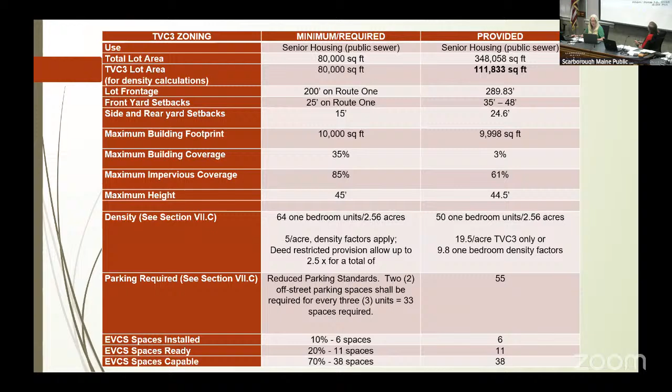And other than that, the parking is really the same. The reduction in parking would only require 33 spaces. They are proposing 55, so they do have 1 space per unit. They are meeting all of the bulk standards, and they are under the density allowances. They are also meeting our EVCS spaces installation. The height, they're right there at 45 feet. The maximum impervious coverage, they are lower than the allowed 85%, and they are much lower for the maximum building coverage. And with that, I will turn it over to the applicant and let them answer any questions. Sure.

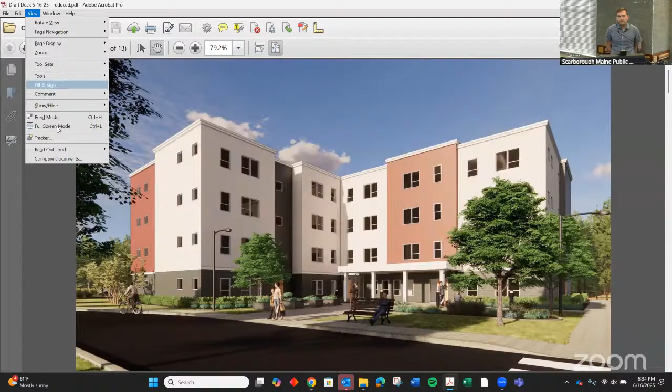Sam, I will promote you. Oh, thank you. All right. Thank you everyone for coming. My name is Ben Money. I'm a development officer for South Portland Housing Authority and the 501c3 South Portland Housing Development Corporation. So today we're going to be talking about the revised development, Marshview Terrace. A few things about our organization for any members of the public that weren't here for previous presentations.

The South Portland Housing Development Corporation is a 501c3 nonprofit that is able to work in and around South Portland and truly the whole country. Our goal is to provide safe, honest, respectable, clean housing in our community and neighboring areas. Through that, we have developed and currently own 795 units of housing. We're developing another 100 in the area. One of ours is Jocelyn Place, a 60-unit building near the Hannaford. That building's been online for just over a year, and it has provided us with a ton of excellent data that has been poured into this project as well.

Some of the items I just want to highlight is that we've been able to use our connections with the city and neighbors to really take in a lot of community feedback through this process. We've been very process driven based off of what's set forth by the town, which is also why there's been so many opportunities for public comment: the town council and our zoning application, as well as previous comments and meetings that we've had with this planning board. We like to think that this has been a culmination of a year and a half of collaboration with the community, and that's what's brought us to this point now.

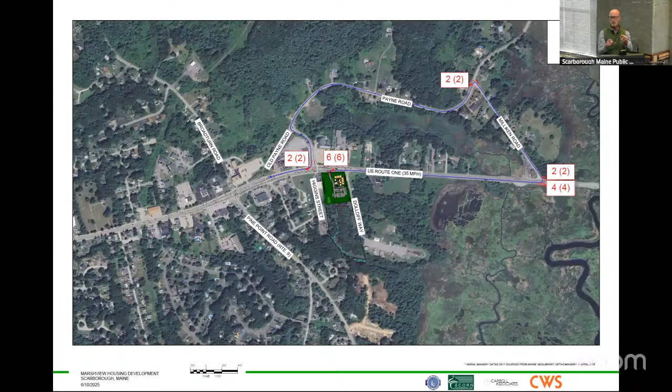And the other thing to keep in mind is, again, we don't have data for what that site used to generate for traffic. It was a flea market, and I don't even know historically what was there. It's likely when that was operational, it was generating more traffic than this. And so from the standpoint of comparing what's going to be generated by this site versus what's happened historically, this is a much less intense trip generating use. Next slide.

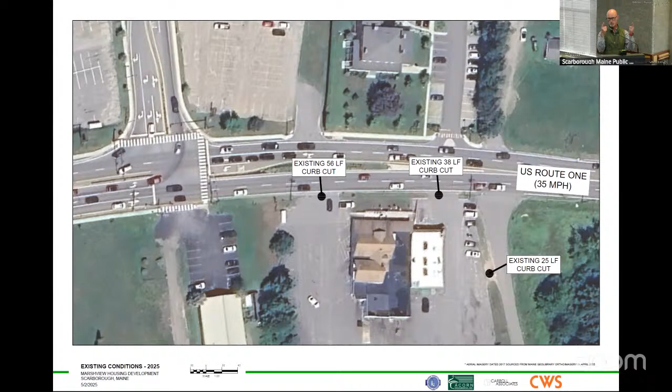So again, going back quickly to this slide, this is the slide I went through. This is existing conditions, 2 big curb cuts on Route 1, another curb cut on Dolloff Way, and then next slide. So this is the plan. So the plan basically is a single driveway, a relatively narrow driveway.

And so again, working with staff, it was desirable to really avoid any sort of left turn out or left turn in movement in terms of conflict points. This really minimizes conflicts. In terms of access management, this is the safest type of configuration you can have in terms of avoiding some of those complicated left in, left out movements. So we have a single driveway where there used to be 3, and it's also narrow. So that's sort of part 1.

Part 2, there are a few sort of minor things, signage to just reinforce the turn restrictions, extending that raised island. Again, it's raised directly in front of that driveway. Then it becomes sort of this flush concrete. The plan is to extend that island so that ultimately it really minimizes that illegal U-turn potential that could happen. But again, that's something that exists, I think, quite a bit along Route 1 in the area.

The other part of this, and that's why I talked about, it's more than just about the vehicle. The project's installing a sidewalk along their frontage. It's going to connect to the sidewalk system at Payne Road where there's a signal. So the intent is, listen, if people want to take advantage of some of the other land uses in the Dunstan Corner area and leave their car in the parking lot, this provides good connectivity to the existing sidewalk system. Hopefully it'll even reduce traffic volumes even more by providing those conditions.

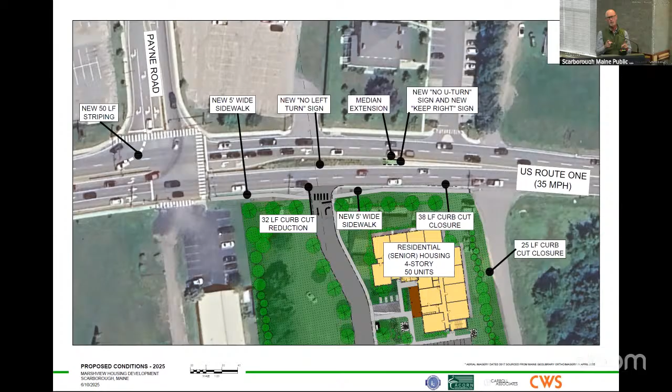And I think that's it. Is that it, Sam? Oh, great. That's right. I forgot about that.

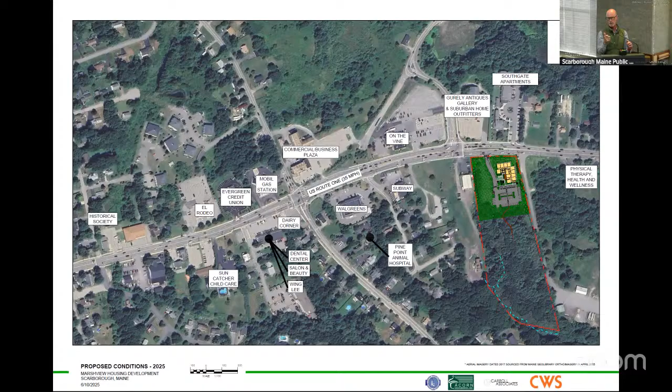And then I think the next slide presents the mixed use condition in this area where we think there are opportunities for people to basically walk between the site, as a residential use, to some of the commercial businesses that are there. That's the whole purpose of locating these types of developments in a mixed use area, to encourage foot traffic or other non-vehicle type movements. There is bus service here. That sidewalk system will provide connectivity to bus stops. So again, there are other opportunities to leave your car in the parking lot.

So I'll just leave you with my general summary on things. From a driveway perspective, and this links with the ordinance, the ordinance really speaks to minimizing conflict points as part of driveways, and this does that. The right in, right out minimizes conflict points. So I think it checks that box. The second one is access management, minimizing the number of curb cuts, thinking about how to manage curb cuts. This project reduces the number of curb cuts and ultimately has one narrow curb cut, so it checks the box on that.

And then another key ordinance element is thinking about all transportation, including walkability. And again, this project proposes a sidewalk system that connects to a pretty robust sidewalk system in the Dunstan Corner area. And so this project helps to do that too. So anyway, thank you very much.

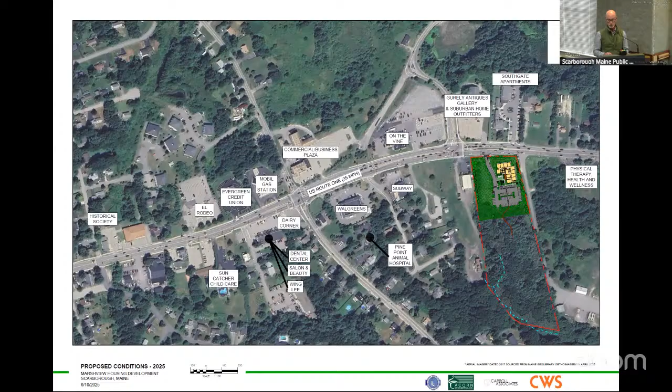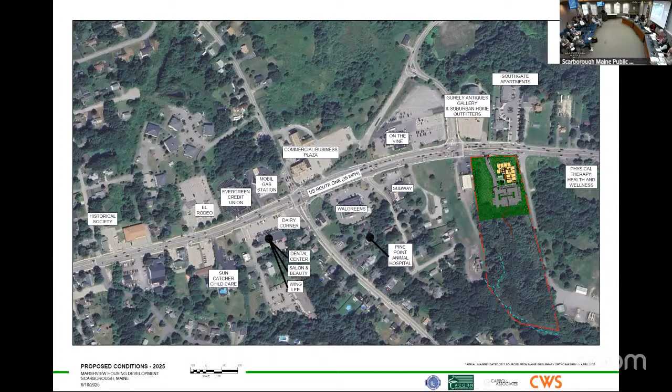Great. Thank you, Tom. Members of the board, my name is Sam LaBelle with Acorn Engineering. I'm just going to run you through the site design and the revised proposal. We are, of course, pleased to be back in front of you tonight with a significantly reduced and lower scale project. After hearing feedback from the board, the public, and council, we went back to the drawing board and took a hard look at how this project could eliminate wetland impacts as well as reduce traffic impact. And what Ben and Tom have already introduced, I think, speaks well to that. We are entirely by right at this point. We are not asking for any variances from the zoning ordinance, nor are we asking for any waivers from the planning board.

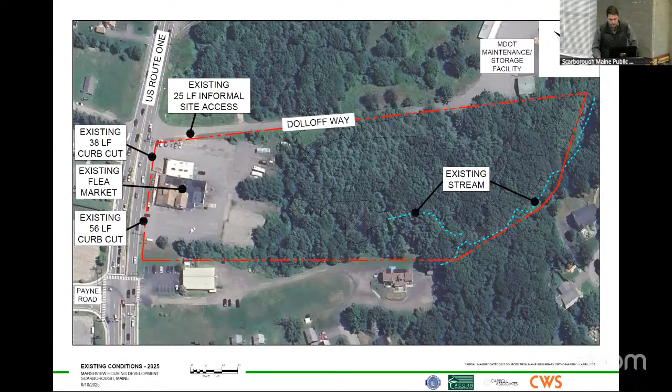So just quickly, again, looking at the existing conditions, you've got the flea market with 3 curb cuts, 2 off of Route 1, really unorganized and informal access into the site. The existing stream and wetlands are within the forested area there to the plan right, which feeds into the Scarborough Marsh system. And then flipping to the proposed site plan, you can see here we are now working entirely within the existing development footprint. In fact, we are actually reducing both the impervious area and the development footprint. As I mentioned, the wetland impact has been reduced to 0. We are respecting at least a 25-foot setback and much greater in most instances.

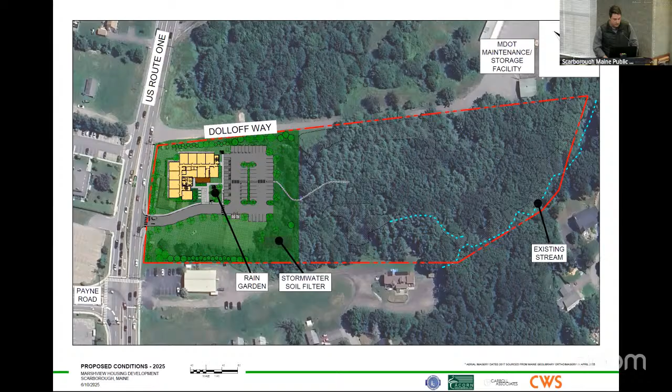Zooming in one more frame into the proposed site layout, we have moved the building back from the proposed 28-foot setback. We're now at 35 feet here at the pinch point. That then increases to 48 feet here towards the middle of the site. Of course, the right in, right out is consistent with any other major site plan that goes through the planning board process. It is a restricted movement by design. Traffic would flow in. We have a pretty conventional parking lot layout with 55 parking spaces, so a ratio of 1.1 parking spaces per unit, which is a fairly standard ratio.

The electric vehicle charging stations we have implemented here at the middle of the site. We fully meet the ordinance in that respect. We've also marked the EV capable parking spaces, as well as providing conduit and pull wire to all parking spaces for potential build out of the EV charging system.

We've incorporated a landscaping buffer around the perimeter of the project, really trying to reestablish vegetation where historically there hasn't been any. I'll show on the next slide a pretty drastic improvement when it comes to impervious area.

One key component of the design that hasn't changed is trying to create this courtyard in the interior portion of the building, or the inside of the L there. This area faces south. It's where the main entrance is. We have provided a rain garden, benches, seats, and other areas for that community aspect and placemaking, which has been really successful at Little Dolphin, which has been operational now for about 2 years.

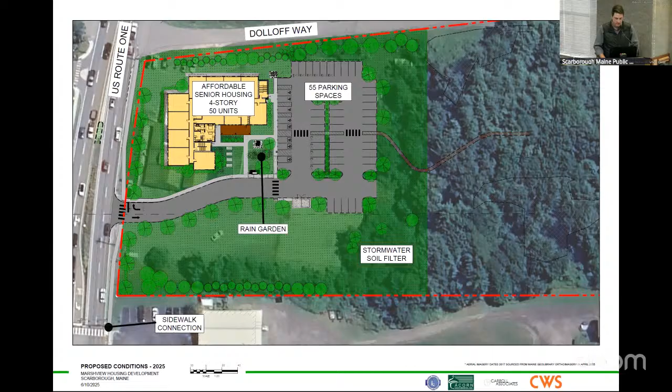And then just putting the project parameters in a table here to compare it to the previous application on the left, which was before the board and council earlier this spring, as well as the existing site on the far right-hand column. So going down, you've got impervious area, which we are proposing at 0.89 acres. As you can see, that's about half of what exists out on site today at 1.79. And it's also a drastic reduction from the previous application.

Similarly, developed area, we are proposing 1.62 acres of developed area. That includes roof, pavement, and lawn areas. That is also a reduction from the existing site and a drastic reduction from the previous application.

Looking at the front setback, the existing site out there today, not including the large deck that is in between Route 1 and the building, but actually taking it to the 2-story structure, is at a 20-foot setback right now. The average front setback for our proposal, we would be more than doubling that. Again, another increase from the previous application. Looking at wetland impacts, the previous application was close to 13,000 square feet. We have eliminated all wetland impacts.

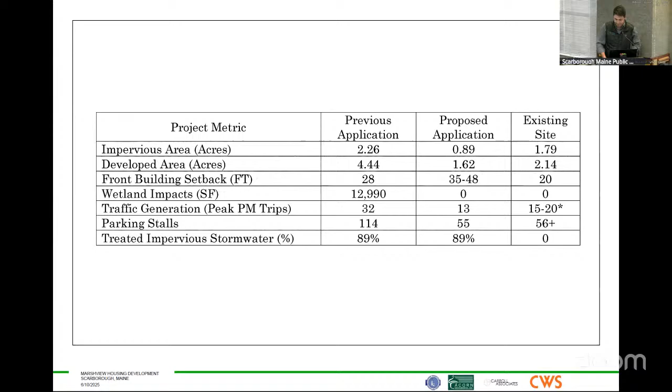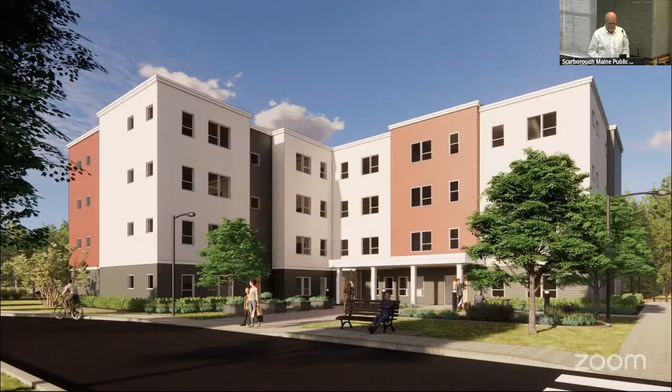Thank you, Sam. I'm Ben Walter with CWS Architects from Portland, Maine, where our office is right across the street. We have been working on modifying this proposal along with the site. Most of the changes have been based on the site, but we've put a lot of focus on the pedestrian character of the building too, the south-facing courtyard, in terms of having outdoor space. You know, this is the home for 50 senior people. We've worked on a lot of senior housing projects, and one thing that's really important is that they do create a community of their own on these sites.

And so we really try to design and reinforce around that. What you're looking at here is what you're seeing on the exterior, the outdoor spaces. The south-faced courtyard is going to be a very viable space, protected from the street noise, et cetera. So that's what we've done. But right inside, beyond those, the entry is all the community spaces that go along with the building.

And aside from that, the building is really 50 apartment units. So it's the ideal size community for a senior housing project, because a certain amount of critical mass makes for a community within the space itself, within the building itself, that's viable. With that said, they're certainly going to have the ability to walk to other amenities nearby, drive to other amenities, et cetera. We've seen this kind of model work very successfully in the past, and that's pretty much all I have to say. So, thank you.

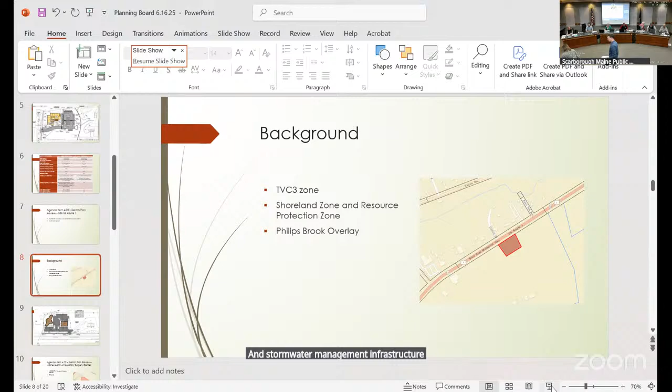All right, the next item for consideration is 4.02. Gorrill Palmer, on behalf of XL Golf, is requesting sketch plan review for a proposed mixed-use commercial development to include a 5,000 square foot hair salon building and a 3,500 square foot office retail building, each with associated parking, utilities, and stormwater management infrastructure at 556 US Route 1, Assessors Map U35, Lot 2A. I believe, Helen, you're going to introduce this one?

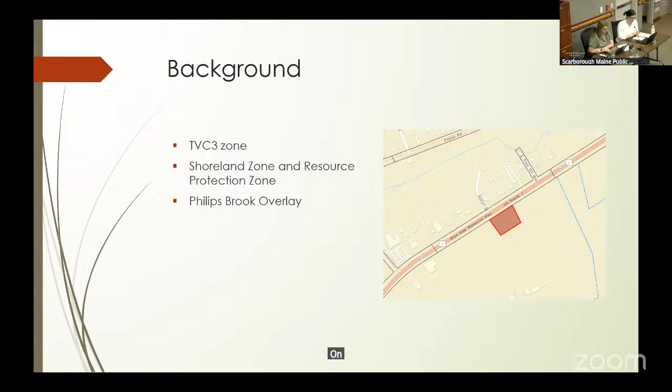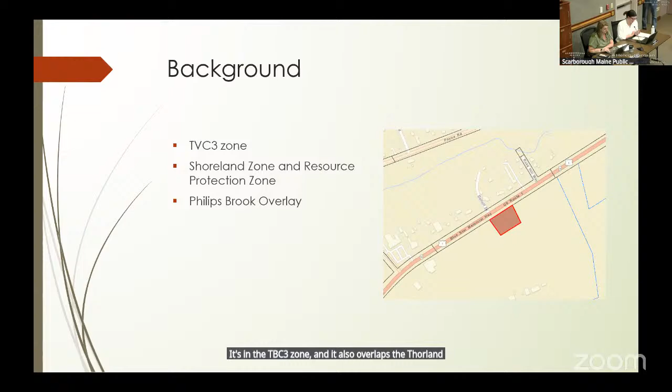Thank you, Mr. Chair. As you said, this is a sketch plan proposal for a 5,000 square foot hair salon and a 3,500 square foot business office on about a 1.25 acre parcel at 556 US Route 1. It's in the TVC 3 zone, and it also overlaps the shoreland zone, the resource protection zone, and the Phillips Brook overlay. And I believe the applicant is available for questions. Thank you. And for the applicant?

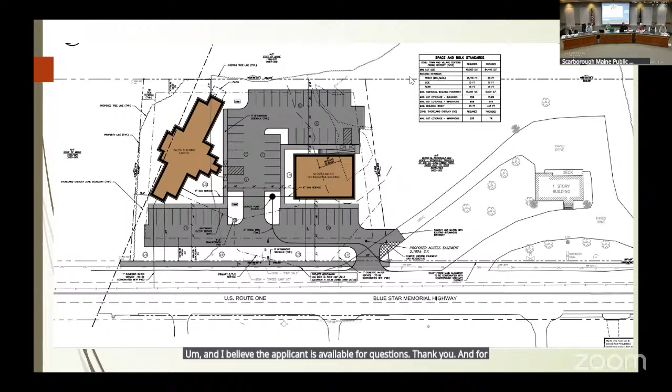Hi, good evening. My name is Caleb Rass. I'm from Gorrill Palmer. I'm a civil engineer representing XL Golf. Here with me this evening is Wendy Holden from Onyx Creative, the project architect for the project. And oh, there I go. Looking to just join in as a panelist here. One moment.

Very good. So as Helen had mentioned, what we're here to discuss this evening with you all is a commercial development located at 556 US Route 1, actually about 800 feet further north on Route 1 from the last project that we just discussed. This is a sketch plan review, and the primary use being a 5,000 square foot salon.

So project overview, we're at map U35 lot 2A. This parcel was part of a larger parcel that was recently split from the adjacent parcel, which has the U-shaped driveway now. And so we're predominantly in the lawn area just north of that. If you've driven by there, there's a little bit of a slope down towards the marsh in the southeast.

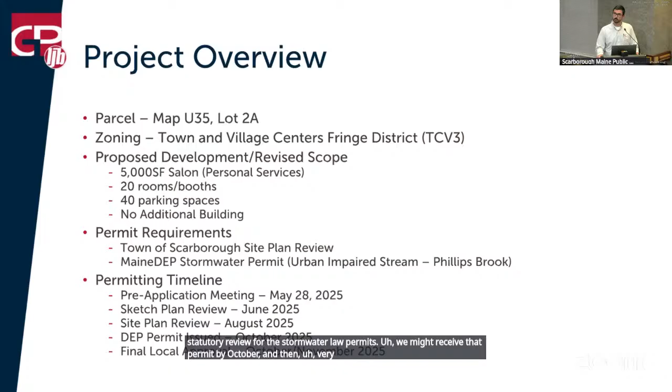So just a couple slides coming up next here, just to orient on the site to where we are. Shown on this view here, we have the Payne Road intersection with Route 1, just a little bit north, as I mentioned, about 800 feet north of the previous project there. Our box is shown in white here on Route 1. We are on the south or the southeast side of Route 1.

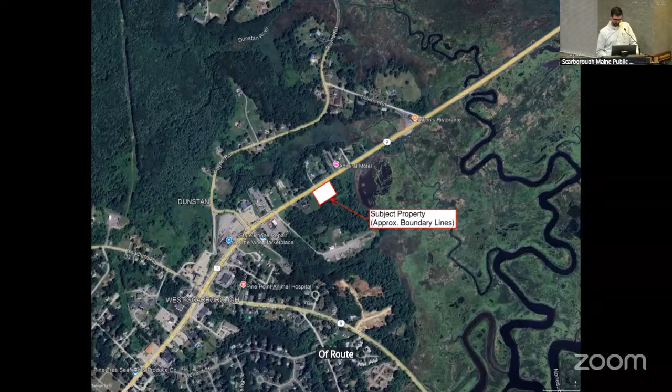Here's another aerial image showing the lot characteristics now as well. So predominantly lawn area now that this property has been developed and then maintained as lawn. There is a portion of wooded area which it looks like has been cleared from time to time, but there are some taller pine trees that remain on the parcel. And then as you move a little bit off site it becomes a bit more scrub. There are some invasives that we've seen in there as well. But overall, our project site will remain in the existing lawn area predominantly.

This is a view now, actually flipped here. So south would be the top of the page, and north the bottom of the page, and Route 1 shown going left to right across the bottom of this plan. So what you can see on this plan is the topography. There is actually a little bit of grade that does pick up across this site, generally from the northwest in the bottom right corner to the southeast in the top left corner.

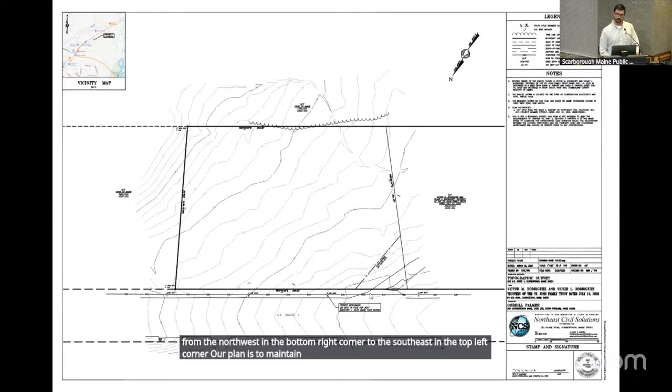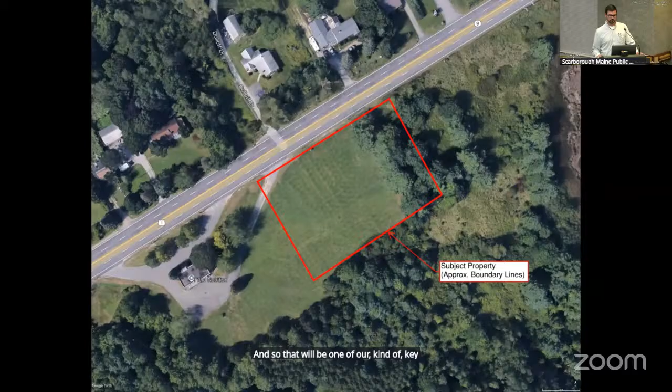Our plan is to maintain this existing curb cut that remains on this parcel now and was seen in the previous aerial image. When this lot was split from the larger parcel, there is an access easement that provides access to the adjacent business that does remain. And so that will be one of our key coordination items going forward, maintaining that access for those folks, and also creating a safe condition for both of us on this curb cut onto Route 1.

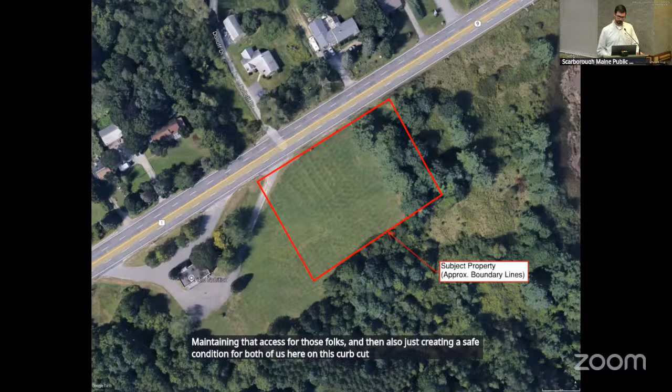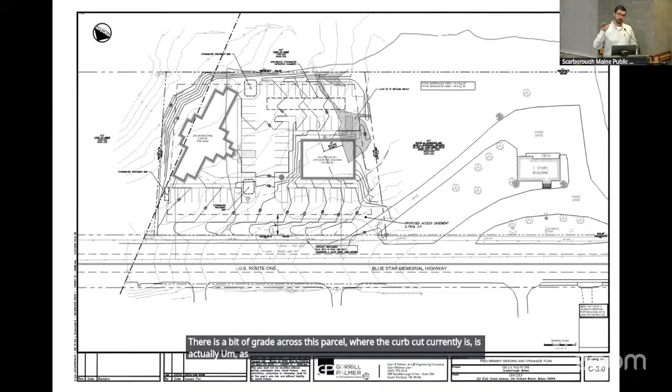For grading across the parcel, one of the key things that will remain will be more or less what we're trying to do with the grading scheme on this parcel. There is a bit of grade across this parcel. Where the curb cut currently is, is actually as the hill starts to more or less crest. So the access conditions onto Route 1 are most ideal at this location.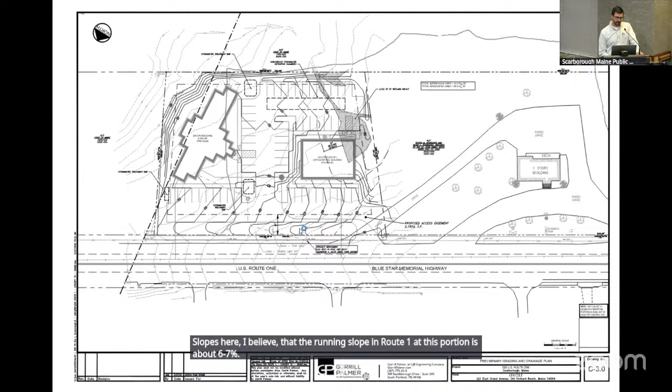You will have some degree of slopes here. I believe that the running slope in Route 1 at this portion is about 6 to 7% maintained. So you'll see similar grades coming down into the site here, if not a little bit steeper, so that we can make up grade to flatten out so that we can provide areas for more flat access for ADA conditions, which want to be at less than 2%.

If I go back one last slide here, just to talk about the utility access that we have, there's public water available in Route 1. That's shown on this plan close to the center of Route 1. We have power near side to us here. We're planning to need 3-phase power. The idea for that would be to pull off of one of the poles, most likely in the north end of our frontage, and then provide a pad mount transformer kind of out of sight off of the side of the building.

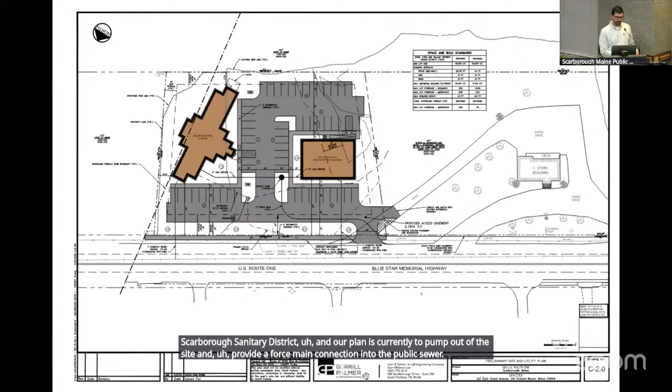For sewer, we do not have public sewer readily available right in front of us here, but there is public sewer available about 800 feet south of us in Route 1. And so we've already started some discussions with the Scarborough Sanitary District, and our plan is currently to pump out of the site and provide a force main connection into the public sewer just south of us there.

When I move over to this revised plan, so again, this is the revised plan, a little bit less detail than what you previously saw there. We did not have a grading concept prepared for this one, but what I'll say is that most everything stays very similar. The idea for this building placement is to face this building, and Wendy can talk a bit more about the architecture we have in the slide here, an initial rendering, and she can talk about the vision and what we're truly looking for an experience for folks that are going to be attending or using the salon.

So the idea being that we're going to be really capturing these southeast views of the marsh and pointing the long ends of the building, which will have windows from each of the booth areas, towards that area. You'll also be lining up generally with the movement of the sun. So even in the afternoon, there will be some good sun coming into the building as it faces Route 1. Additionally, we're providing a little bit of separation from this building to Route 1, which is similar to the original plan, to avoid noise from Route 1 from traveling vehicles there.

That'll give us an opportunity to provide some robust landscaping in there to really try to also create a little bit of an isolated feel for some of those folks that will be inside the salon, and really comply with a lot of the items that are going into the town's form-based code here, or the TVC3 district.

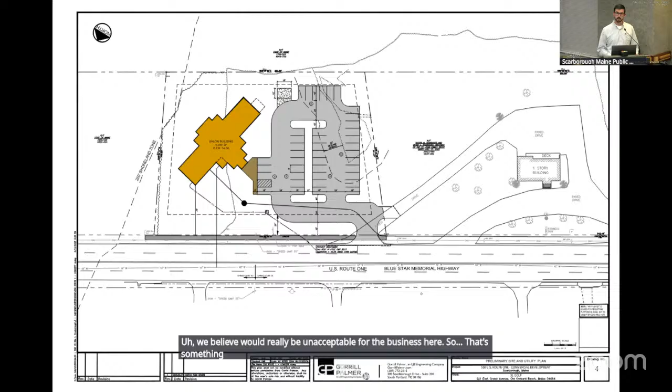We have built on some of the items. You'll see the sewer force main will still be the same scheme connecting into the public force main up the road, still the same access for water and power as well. There is no natural gas available here. The plan will be propane for the time being for hot water services there. And we haven't really ruled out electric for any of those services, but at the moment, we're going to be going for propane.

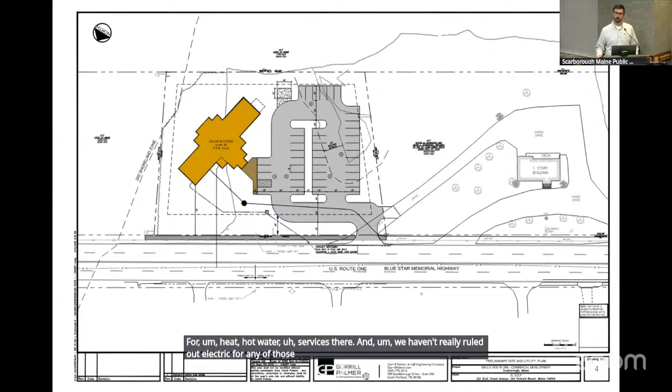Let me see on the next slide. From there, I'll turn it back over to Wendy to talk about the architecture. Good evening. Since we've submitted, obviously, we've continued to work with our client and wanted to just give you a sneak peek at some of the direction that we were taking.

As Caleb mentioned, what we're trying to do is kind of angle it and tuck the building back on the site to allow it to kind of fit within nature and creating these nice windows so people can relax while they're visiting this business. As well as now that we've pulled the parking away from the front, we can create these pockets of landscape to help create that atmosphere that the owner wants to create.

So as you pull up, you'd have the center space becoming a two-story, more grand entry, glassy, and then the backside. Backside has 4 booths, and then each wing off to each side has 8. So each has views out of the building directly. And then what happens on the interior doesn't obviously matter from your perspective, but you can see through the space because the interior walls will be glass as well. So it's this kind of layered effect through the building as well.

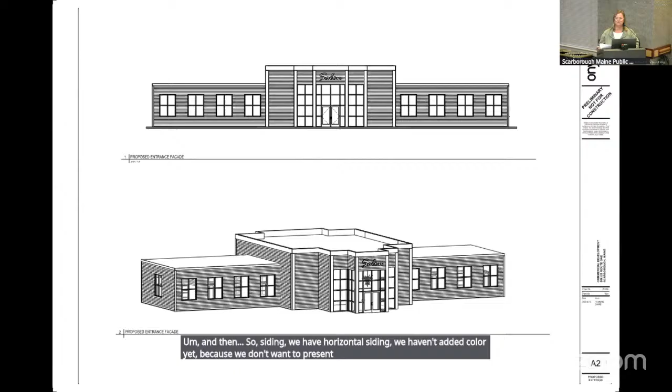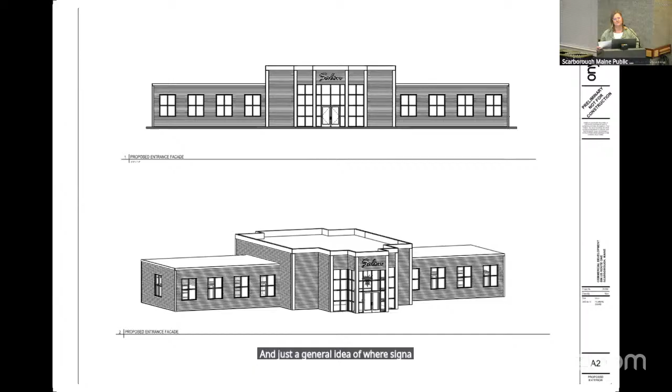So this is generally the form. We have a parapet around the top of the higher part of the building where we could put units once we get to that point in the development of it. And then, siding, we have horizontal siding. We haven't added color yet because we don't want to present something to you that wouldn't be what the owner wanted. So we're working through that with them now, and just a general idea of where signage may go on the front bump out. So generally, that's the direction that we're taking right now for the concept.

Thank you. Thank you.

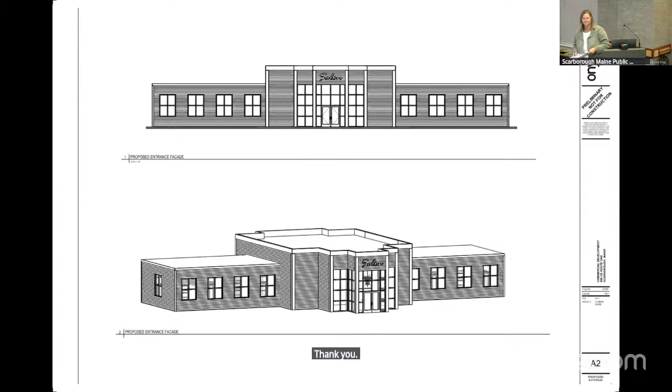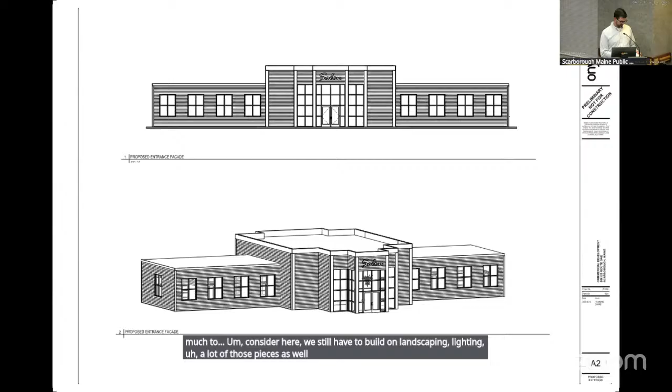And I just wanted to note really quickly, obviously, there's still much to consider here. We still have to build on landscaping, lighting, a lot of those pieces as well. So just really quickly wanted to discuss the impact on this plan as well. For total impervious area, considering total lot area, we're about 1.25 acres here. We just barely tripped the stormwater law permit for the urban impaired stream. We're at about 23,000 square feet, I believe, of new impervious area associated with the revised plan, as compared to about 35,000 square feet in the previous one. And then our total developed area within the majority of really that lot area is just less than 1 acre now.

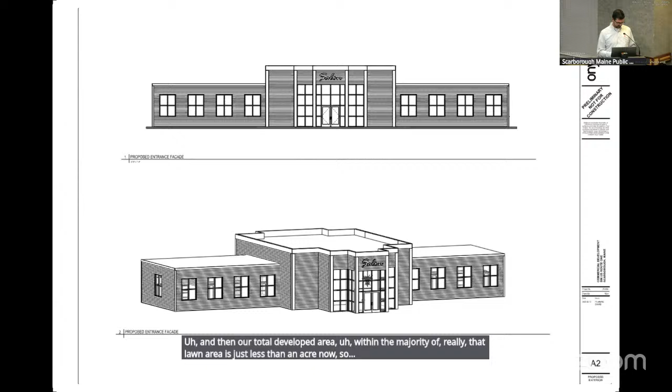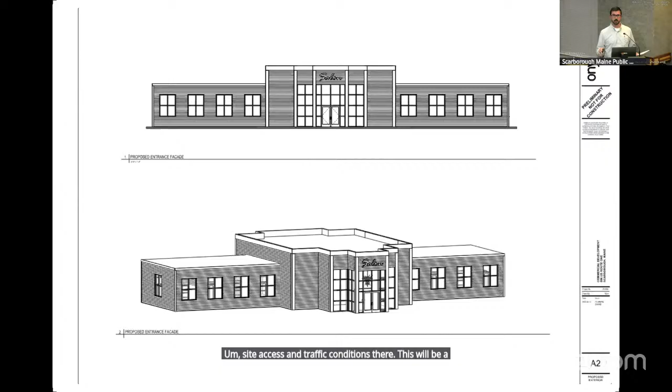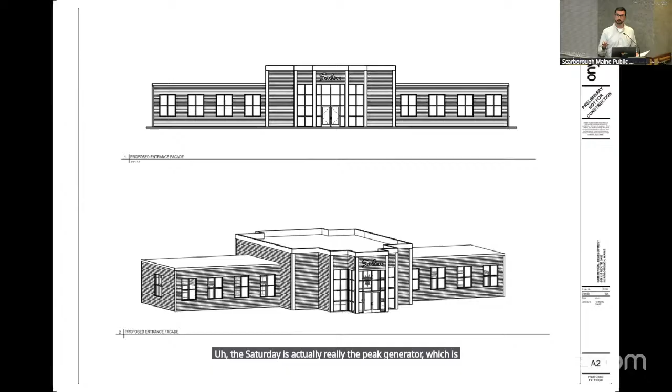So I think that's just about it for us. We're certainly happy to talk a bit more about site access and traffic conditions there. This will be a low generator. I believe what we had for trip generation thus far, the AM and PM peaks for the weekdays are about 6 in the AM and 10 in the PM. The Saturday is actually really the peak generator, which is about a 25 trip number that we had. So I'll leave it with that, turn that over to you folks, and looking forward to continuing discussion on this.

Thank you. Before we start that discussion, I am going to open this agenda item up for public comment. Anyone wishing to make a public comment, please state your name and address at the podium.

Richard Hayes, Martin Avenue. I don't know anything about this project, but my concern, and it just seems to be a waning concern of officials in town: this is even closer to the marsh. It's got to have an impact on it. I think this land ought to be bought by the land trust and be conserved, as I said earlier should happen to the Marshview project land. But I just can't believe that we're considering building something; next we'll be building on the marsh. This is unbelievable. Thank you. Thank you.

Denise Hamilton, Two Rod Road. I won't repeat anything I said earlier. But is this also going to be a right-in, right-out? You're, as Richard just said, closer to the marsh. We really need to have infrastructure in place to accommodate the flooding on Route 1 before we keep adding more businesses.

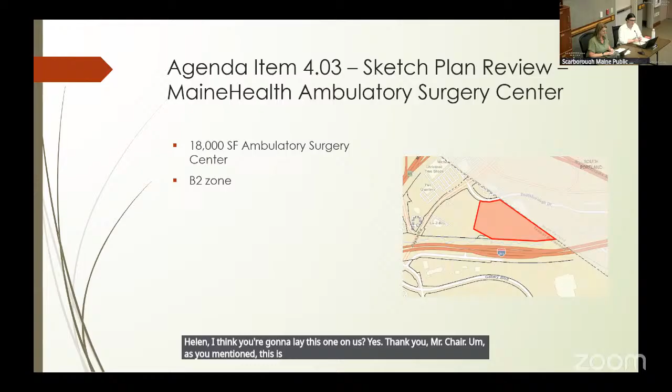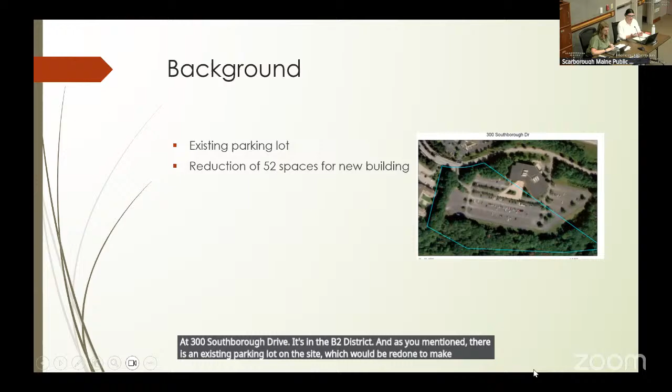Yes, thank you, Mr. Chair. As you mentioned, this is a sketch plan review for the 18,000 square foot ambulatory surgery center from MaineHealth at 300 Southborough Drive. It's in the B2 district. And as you mentioned, there is an existing parking lot on the site, which would be redone to make space for the new building. And that would ultimately reduce the total number of parking spaces on the site. So just wanted to highlight that, but with that, I will pass it to the applicant who's available for questions.

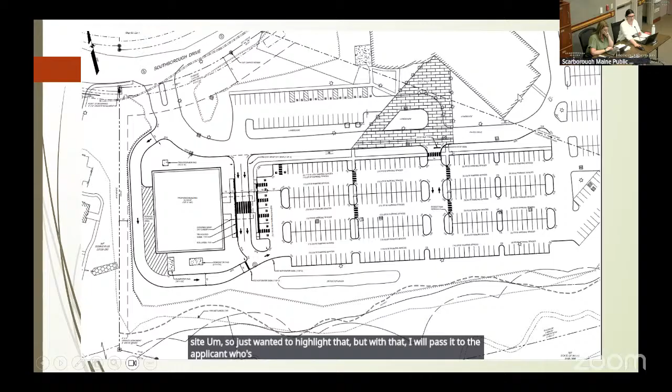Thanks, Helen. And for the applicant? Second. Share our screen here. There we go. You're off and running. Thank you. One second. Great.

Thanks, Henry. Good evening, folks. My name is Al Green. I'm the Vice President of Strategy and Business Development for MaineHealth. And thank you, Mr. Chair and the Planning Board for sticking with it. Although it's a late night for me, I'm sure you're used to this. I'm here to talk a little bit about the why, but I promise I'll make my comments quick. Whenever we talk about proposing a new healthcare facility, we always like to start with the why because, of course, it's important. And I'll transition to my next slide here.

Thank you. Our vision for MaineHealth is working together so our communities are the healthiest in America. And as such, we're working with Boulder Architects as our architecture firm and Sebago Technics for our civil engineering. And I want to talk a little bit about the healthiest communities part of that vision, which this project is an opportunity for us to demonstrate. So with this project, we're looking to do three things. And I'll start by saying that the idea for this project started about 3 years ago when we put together a strategic plan for surgical services at MaineHealth.

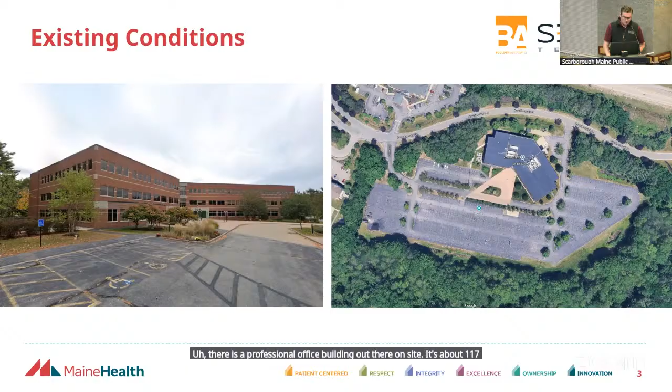So on the site there, as staff mentioned, the existing conditions is it's roughly a 19-acre lot plus or minus. It's majority developed as an impervious parking lot. There is a professional office building out there on site. It's about 117,000 square feet. This property is split by the South Portland Scarborough line. The existing building is on the South Portland side, and the majority of the parking lies on the Scarborough side. It is, as mentioned, in the B2 district.

It's professional office use. The existing building does have access to municipal water. There's actually at least two hydrants that front along Southborough Drive in front of this site here. There is access to municipal sewer as well, that the project is proposing to tie into, as well as the existing building does take advantage of available gas in the road there.

Right now, the parking lot exists, as you can see in a picture right here, in the existing conditions, largely impervious with a number of parking spaces out there. Roughly about 641 spaces. I believe staff memo had me quoted a slightly different number, but we're roughly in the same ballpark there. It's 604, and we've recounted and got 641 spaces.

The existing building out there requires 335 spaces. We did pull that as a building located in South Portland from that South Portland ordinance. That's certainly something we can talk through with staff. We were anticipating the building proposed would be Scarborough ordinance parking requirements, the existing building under South Portland requirements.

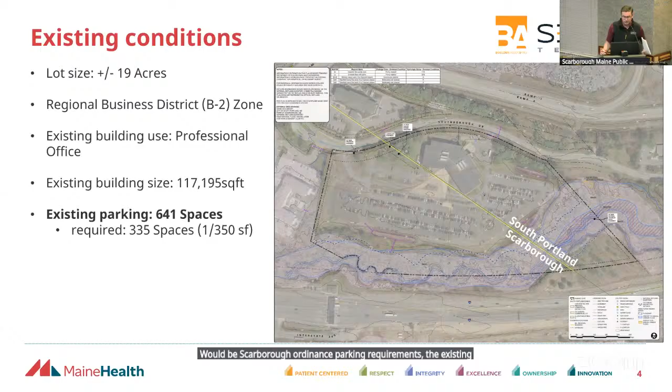The proposed conditions here in our preliminary submission for sketch plan show the ambulatory surgical center, again, professional office use, 18,000 square feet. It showed renovating and putting landscape islands throughout that entire parking lot. Actually, a lot of that parking lot for the use itself, for an 18,000 square foot building, really only need just under 70 or around 70 spaces for that use at that size.

So the redevelopment process here, we're looking at gaining access off that Southborough Drive through the existing access drive. The first turn you'd come to there would be the delivery and drop off for loading that take you around the back of the building. Preferably it'd be a one-way circulation that then links up to the parking lot, and you would exit the lot out another drive aisle. Patients arriving to the building would come to the patient drop-off area before either they or a loved one would be continuing on to find parking. There is ADA parking, prioritized as close as we could to the building with the drop-off there.

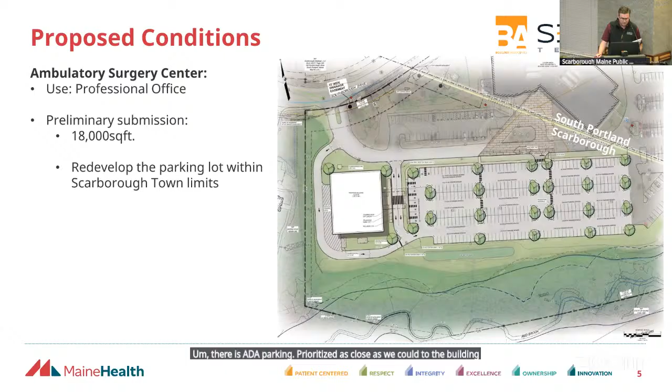I do want to say we have had some changes to the site itself. As we've developed the program in the last couple of weeks here since our submission in May, the building has gotten slightly bigger at a little over 20,000 square feet. And we've just adjusted the drop-off and arrival sequence accordingly, just to the slightly expanded building. You'll see the development footprint largely the same. Really looking to keep the development footprint within what's required for the spaces for the use itself. The parking required for a 20,000 square foot building is that 4 per 1,000 at 84 spaces.

The building coverage on the site is about 16.5 overall, 50% allowed in the zone. The total proposed spaces about 102, 12 of those being ADA and only 9 required. MaineHealth seems to find that, especially for an ambulatory surgical use, they like to provide higher than even what's required. I believe the ADA guideline is 10% for a use like this. They're rising above that 10%. So we found that the total required parking is available to satisfy both uses on the site.

But you'll see now from the submitted package, there was just a plain rectangle at 18,000 square feet. What you see here has a slight bend in the building to assist in some of how the spaces are laying out inside the building there. Largely, access to the site hasn't changed. The goal in this site in developing it, we have an existing site out there. Access will be from Southborough Drive. Utilities are on municipal water. There will be municipal sewer, as I'd mentioned.

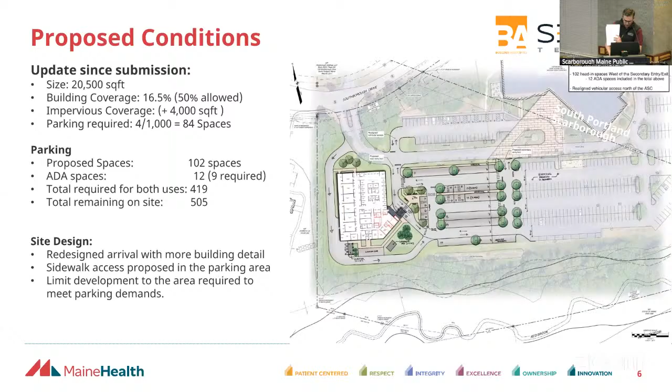We did provide an architectural rendering this evening that Boulder Architects has provided for us, just to give a quick visual understanding of some of the preliminary materials that might be used here. All looking to be non-reflective building materials, moving away from the brick currently, and proposing kind of a mixture of materials there, including some glass along the entry, just to provide that transparency in the building and provide good light into the building. It's a single-story building, as reflected here.

The site itself, in redeveloping, we will be handling some of the lighting. Of course, there's some lighting in that parking lot today. Any lighting submitted as a part of the packet going forward will certainly make sure to be meeting the dark sky compliances, IES standards, and the Scarborough ordinance. Traffic for the site, let me pull up my numbers on that. Traffic for the site anticipated, a quick generation here, about 63 trips in the AM and 87 in the PM.

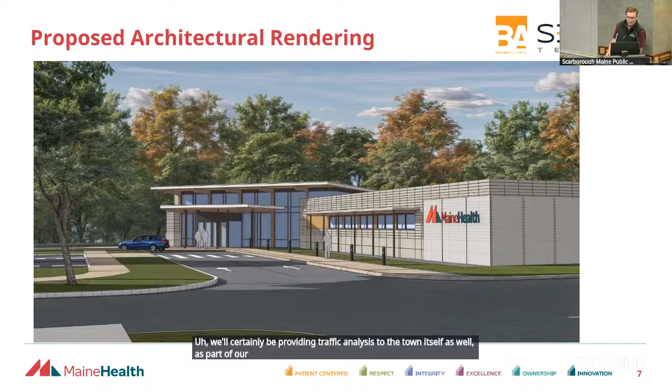We anticipate that we'll be providing a full traffic analysis for Scarborough. We don't anticipate any large DOT permitting as a part of that, as we are under the thresholds for a traffic movement permit. We'll certainly be providing traffic analysis to the town itself as part of our preliminary application. But with that, I can certainly turn it over to the board for any comments or questions you may have. Certainly appreciate it.

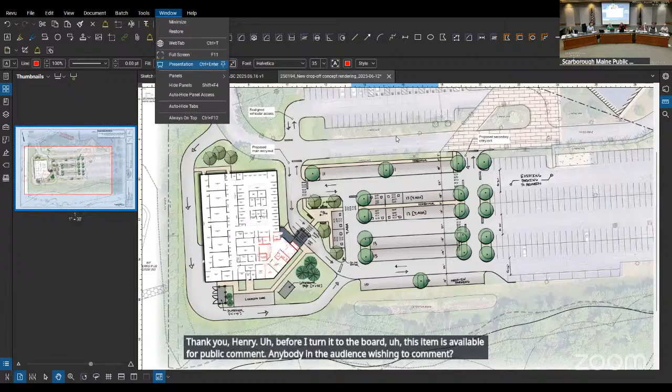Thank you, Henry. Before I turn it to the board, this item is available for public comment. Anybody in the audience wishing to comment, please do so now. Anybody online? Seeing none, close public comment and turn this over to my colleagues in no particular order. First hand I see gets it. Okay, Rachel.

Yeah, I'm familiar with the site back there because I've had frequent meetings at the 300 building there. And I really appreciate the fact that you're going to take what's essentially a very desolate parking lot and do some good work with it. But now I have a question about that work. It looked as though you're going to cut off the work in the parking lot about halfway down. Do you own the whole of that parking lot? What's the extent of the ownership?

Yes, they do own that whole lot there. It would be awfully nice if we had some landscaping in the rest of that lot. Really would. Because just stopping the landscaping and the rehab partway down then looks a little raggedy.

Let's see, you had the deliveries coming in the first exit, the first turn. You're going to need some good wayfinding directions there, delivery trucks only sort of thing. And a direction that says patients this way, something that makes sure that people get to their site.

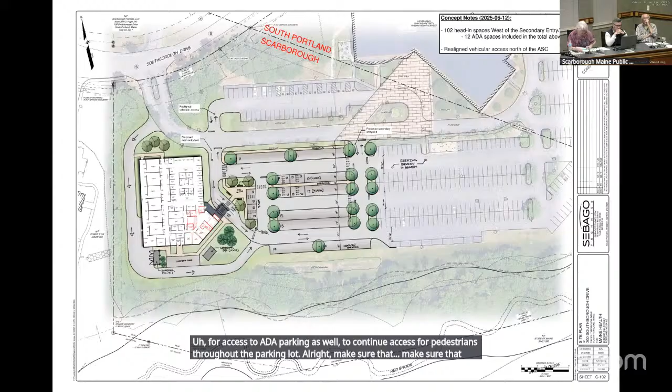Certainly. To get out of the site, you go. Okay, you have to go halfway down the parking lot. And then turn, in other words, you pick up the patient, you turn left, you go halfway down the parking lot, you turn left and turn left, correct? You could either turn left or right there. You can get out to Southborough Drive on either access, left or right.

Yep. Provide some decent signage arrows, because the people who are coming are likely only to be there maybe once every 5 years. So they're not going to get into a routine of knowing how to get out. So anything that you can help them with, again, would be very helpful.

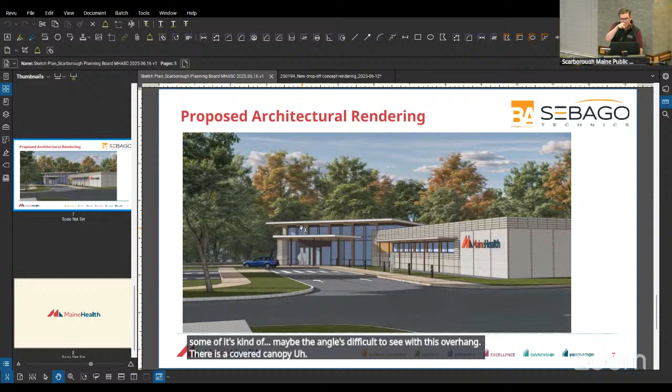In the new configuration, are you going to have any sort of covering portico for picking up and dropping off patients in bad weather, especially when you're picking up a patient who's hobbling along? Yes, maybe the angle's difficult to see with this overhang. There is a covered canopy at the entrance there. And as well, in the renderings we've shown, there will be one at least over that first drop-off aisle, not the bypass lane. So that people can drive under? Correct. Okay. Wasn't sure what you had there.

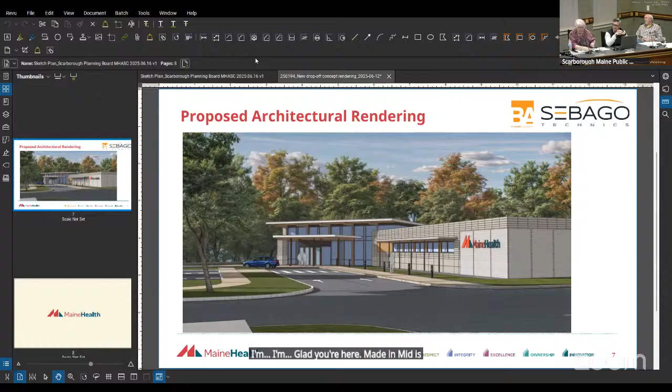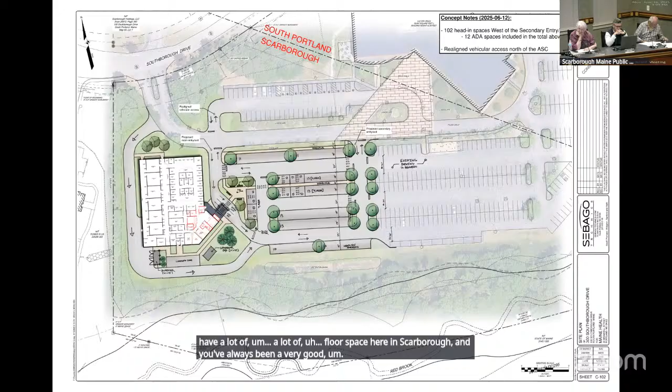I'm glad you're here. Maine Med is a quality organization. I've used your surgical center. Don't want to use it again. You have a lot of floor space here in Scarborough, and you've always been a very good neighbor. So, thank you. Thanks, Rachel.

James? Thank you, Mr. Chairman. I think this is a really suitable application for the location of the facility. I think it's a good use of the space. The only thing I'll add, just to ensure this doesn't get missed, is for after-hours lighting, outdoor lighting located more than 30 feet from the building must be turned off 30 minutes after closing and remain off until business reopens.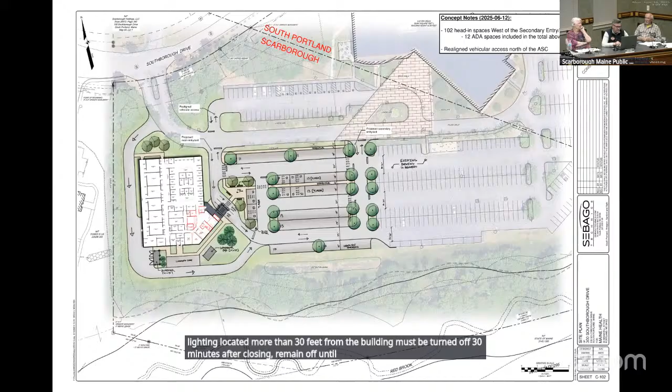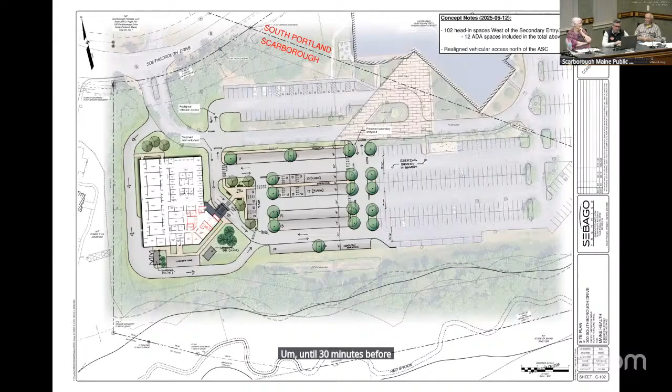And then any exterior lights that have to be on after hours within that 30 feet need to be 50% dimmed or lower until 30 minutes before they reopen. So that's all stuff in the ordinance, but just want to make a reminder. Appreciate the comment. Thanks, James. Roger, you want to go? Nothing? You're all set? Okay.

Adam? All right. Yeah, I think this could fit very nicely. I think it would clean up the aesthetics of what it currently looks like, so that's always an improvement. I think you can continue working with staff, fine tune some things, and get together a full site plan submission. But before you go, do you have any questions for us? I think I saw some head nods regarding the parking requirements and ordinances and looking at South Portland and Scarborough there.

Right now, the feedback we've received is very helpful, and certainly as we come back we'll see what we can do about making sure we're hitting our landscape requirements in the parking lot. Make sure that anything we pull forward is showing some good wayfinding signage and locations to direct folks coming to the site. And then, of course, anything with photometrics, we'll make sure we're following the ordinance for Scarborough. Thank you. Excellent.

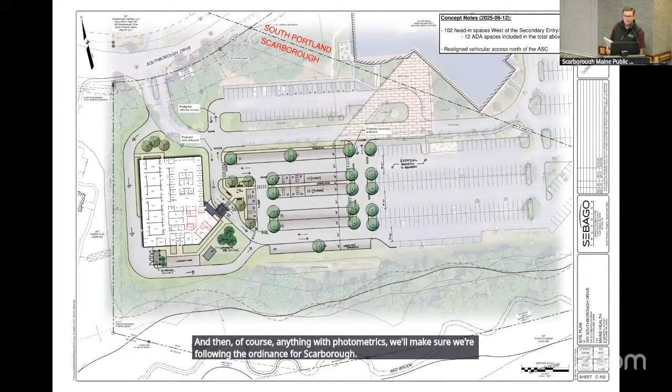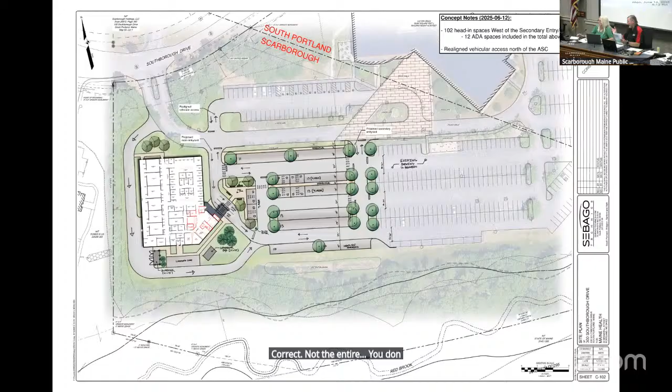I just wanted you to be aware, it will apply to the redeveloped portion. So not the entirety, it's the portion of the parking that's redeveloped, correct? Not the entire. You don't want to do it to your neighbor? You can if you want. No, really, you're not required to.

From that question though, if we're providing 102 spaces overall, but the use requires 84, is it off the 102? It's what you put in. Good. That's all I needed to know.

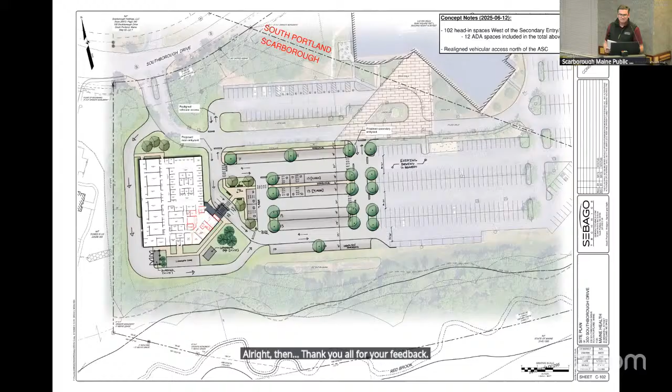All right. Thank you all for your feedback. Then we may see you again. You certainly. Good luck to you. Thank you.

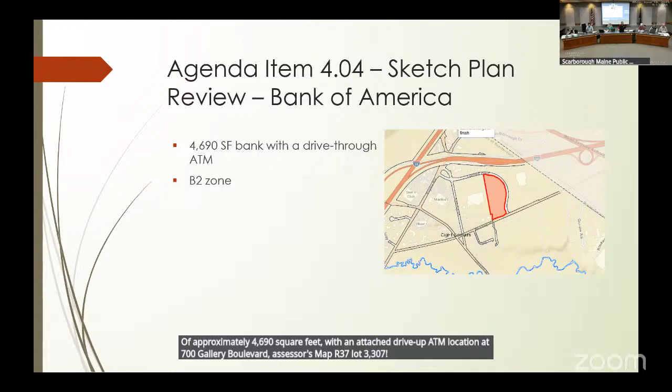All right, folks, we're down to 4.04. The last item under consideration is Stonefield Engineering and Design on behalf of Waterstone Scarborough LLC is requesting sketch plan review for construction of a new commercial bank center building, Bank of America, of approximately 4,690 square feet with an attached drive-up ATM location at 700 Gallery Boulevard, Assessors Map R37, Lot 3,307. I believe, Helen, you're going to introduce this one?

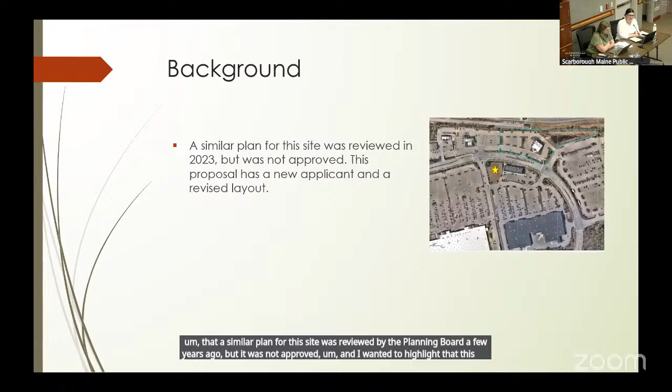Yes, thank you, Mr. Chair. This is our last sketch plan review of the evening. As you mentioned, this is for a 4,690 square foot bank with a drive-through ATM in the B2 zone at 700 Gallery Boulevard. Not too much to note here ahead of the applicant, but I did want to mention that a similar plan for this site was reviewed by the planning board a few years ago, but it was not approved. And I wanted to highlight that this is a revised layout since then with a new applicant. So in case that rings any bells for anyone, just wanted to mention that. And with that, I'll pass it to the applicant.

Thanks, Helen. And for the applicant? Good evening, Josh Klein, Stonefield Engineering and Design. We're the project engineer for the project. I think that was kind of a perfect segue. So this project was in front of this board in 2023. It was never voted on. My understanding was it went to one hearing. There was some feedback from the board. There were definitely some challenges from Maine DOT from a traffic movement permit standpoint, and the project kind of fizzled out.

We were brought on recently. Bank of America is looking now to take over the permitting process and look to move the project forward. So they're leasing this existing vacant portion of the property. It's about 30,000 square feet, next to where the Mattress Firm is. If you want to pull up the site plan, I'll highlight a couple things.

So when this application went in front of the board in 2023, there were some similarities. We took some of the feedback that we found in our conversations with the property owner and looking at some old correspondence on it. One of those included realigning and updating the driveway that would access both the Bank of America as well as the Mattress Firm and multi-tenant strip center to the right-hand side.

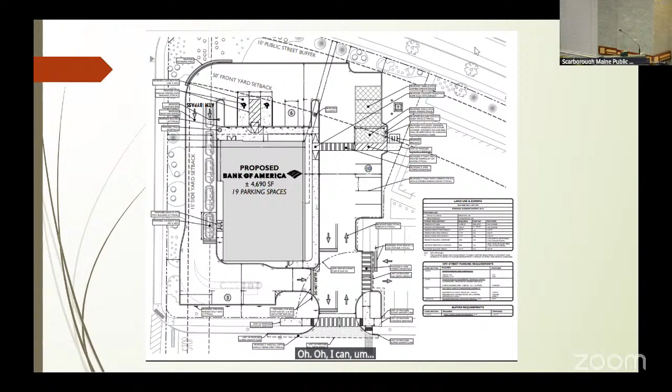I can just have mine. Yeah, I can hand them out. I think you included them in the packet. Yeah, let me open up a different one. I got it. It was perfect. You had everything we needed on one page, so we were close. I do have a board I can just pull up. I think that didn't open. Are you doing it? Oh, somebody got it. Perfect.

So these are the renderings that match the plan that was submitted. The top left would be if you were standing up against that freestanding sign looking at the main entrance. The right-hand side would be a view coming in the main drive aisle. You can see the ATM. And the bottom left is an employee-only entrance. Architecturally, they looked to dress it up a little bit more, since we have a building that has almost 3 facades all facing roadways. So giving it a canopy and some additional glazing around the employee-only entrance. But customers would all be using the primary entrance in the top left corner.

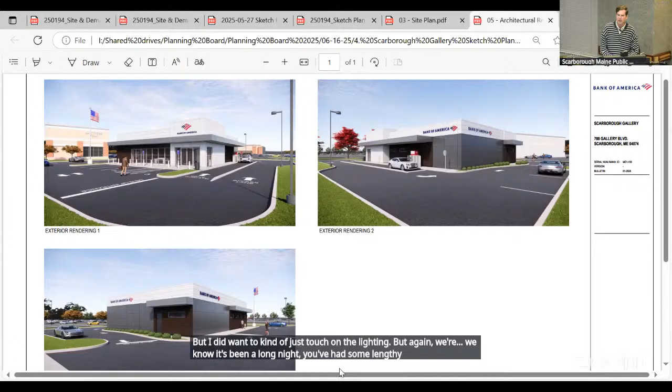A couple other highlights; we'd obviously have to go through this in site plan review. We'll incorporate new site lighting. It is a 24-hour drive-up ATM, and there's a 24-hour ATM in the vestibule of the space, so we have to ensure there would be security lighting 24 hours. Again, no residents in this area, it's a commercial shopping center, but I did want to touch on the lighting. Again, we know it's been a long night with some lengthy applications, so we're happy to get some feedback.

Great. Thank you. This item is available for public comment. Anybody wishing, please step up. We don't have a wide audience in the virtual world. All right. We're closing public comment, and I'll start this one off by saying I vaguely remember being on the board when the bank was being proposed here. Seems like banks are popular, banks and coffee shops.

I think the building looks great. I think you've given some good considerations on traffic flow. It looks like there is no drive-in service available. It's only for an ATM. So the queuing, it looks like maybe 5 cars can fit there before it starts to wrap around. Correct. It's just an ATM, yep.

No kind of screen. Very seldom have I seen more than somebody annoyed at me for being there too long behind me. So I'm pretty content that we won't get any bottlenecking as it turns and then makes its way out of the site. I really don't have any other things to bring up at this point, and so I'll let any colleagues pipe in. Rachel wants to, so you have the floor.